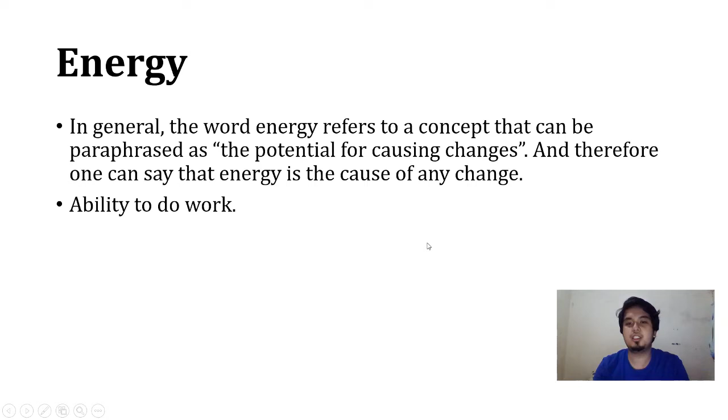So what is energy? So next is Bernoulli's energy theorem. So in my topic, I will discuss to you what is Bernoulli's theorem, derivation, and what are some of the formulas na magamit na to for determining energies like kinetic or potential. So the first is Bernoulli's energy theorem.

So the theorem states in effect that total mechanical energy of the flowing fluid, comprising the energy associated with fluid pressure, the gravitational potential energy of elevation, and kinetic energy of the fluid motion, remains constant. So in Bernoulli's theorem, there are some equations here na makakuha ka og potential energy and kinetic energy.

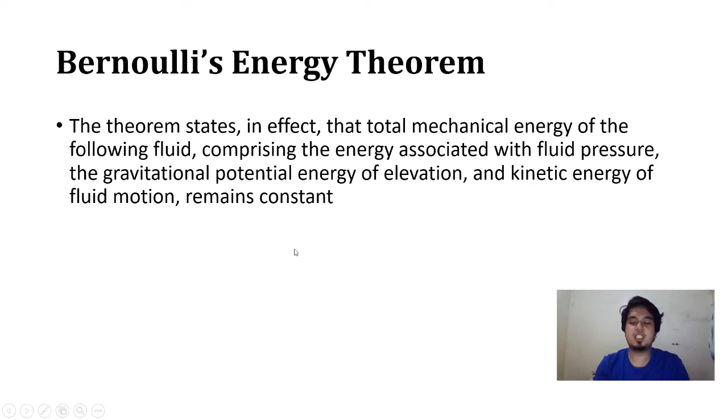So let's proceed. So first is Daniel Bernoulli. So who is Daniel Bernoulli? Swiss mathematician and physicist and was one of the many prominent mathematicians in the Bernoulli family from Basel. He is particularly remembered for his applications of mathematics to mechanics, especially fluid mechanics.

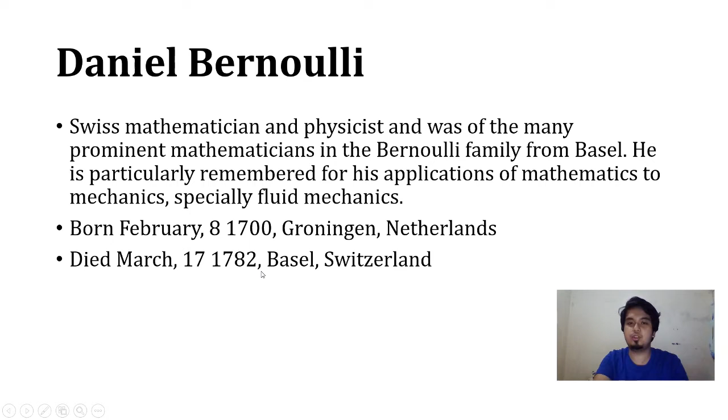Then let's proceed. So Daniel Bernoulli. So he was born on February 8, 1700 in Groningen, Netherlands. So he died March 17, 1782, Basel, Switzerland. So he was 82 years old at that time. So next is, mao ni si Daniel Bernoulli.

So next is Bernoulli's theorem derivation. So Bernoulli's theorem equation. So as you can see here sa akong illustration, at the left side, this is the pipe, and this is the pipe at the right side. So first at the left side, A1 is the cross-sectional area and X is the distance of this pipe. Then P1 is the pressure, H1 is the height, V1 is the volume,

and this one V1 is the velocity. Same as the right side, we have H2, volume 2, pressure 2, cross-sectional area 2, velocity 2, and the distance. So to come up with this formula right here, the final equation, we have some concepts. So first is dV over dt1 equals dV over dt2. So this is the time change constant equation. We can relate these concepts to come up with this final equation.

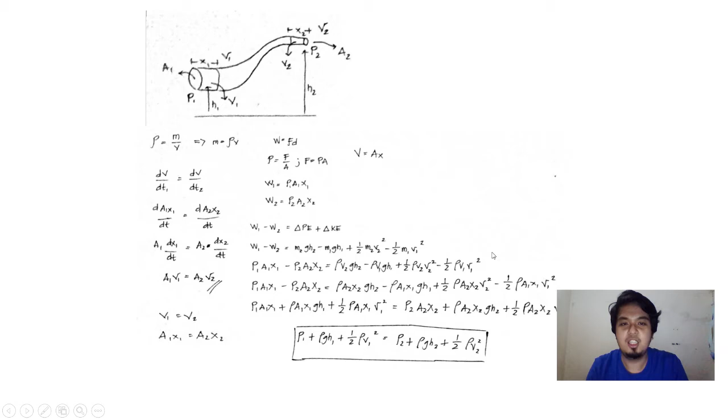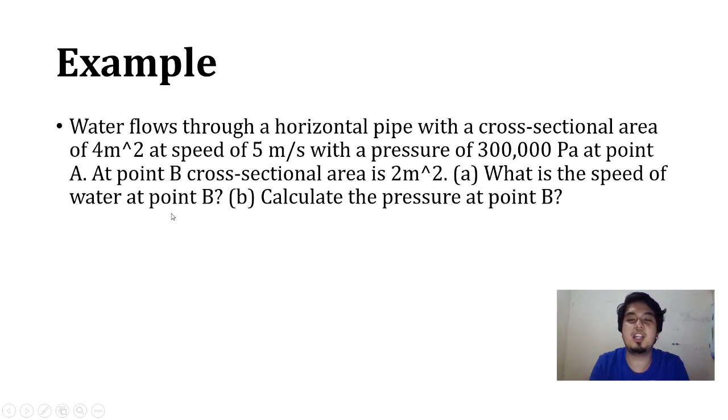So next, example. Water flows through a horizontal pipe with a cross-sectional area of 4 meters squared at a speed of 5 meters per second with a pressure of 300,000 Pa at point A. At point B, the cross-sectional area is 2 meters squared. So A, what is the speed of the water at point B? And B, calculate the pressure at point B.

So, this is my illustration, the drawing. As you can see, wala siyang height. Walay height, meaning naa siya sa surface or sa land. So, A: the velocity at A is given in the problem, 5 meters per second. And atong kuhaon ang pressure B. Area 1 is equal to 4 meters squared and area 2 is equal to 2 meters squared.

So, we can come up with this formula: Q1 equals Q2, or area 1 times V1 equals area 2 times V2. Substitute: 4 times 5 equals 2 times V2. So, the final answer is V2 is equal to 10 meters per second.

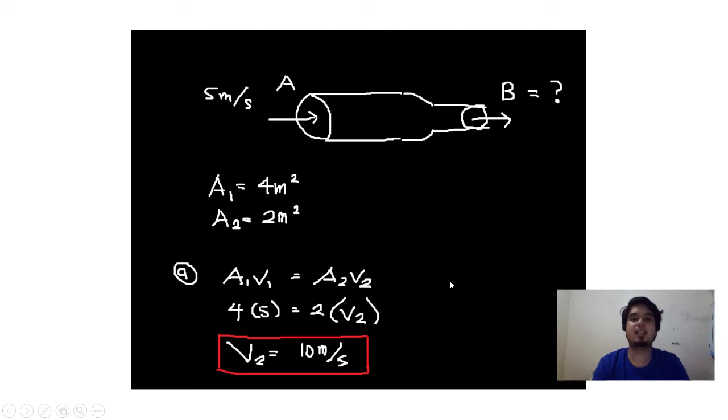Next is letter B. So, this is the Bernoulli's theorem equation. As you can see, walang height, nasa surface lang. So, P1 plus ρgh1 plus 1/2 ρV1 squared equals P2 plus ρgh2 plus 1/2 ρV2 squared. Wala siyang height, so cancel it out to come up with this final equation.

Pressure 1 plus 1/2 ρV1 squared equals pressure 2 plus 1/2 ρV2 squared. So, substitute: 300,000 plus 1/2 times 1,000 times 5 squared equals P2 plus 1/2 times 1,000 times 10 squared. So, 312,500 equals P2 plus 50,000. So we can come up with this final answer, P2 equals 262,500 pascals.

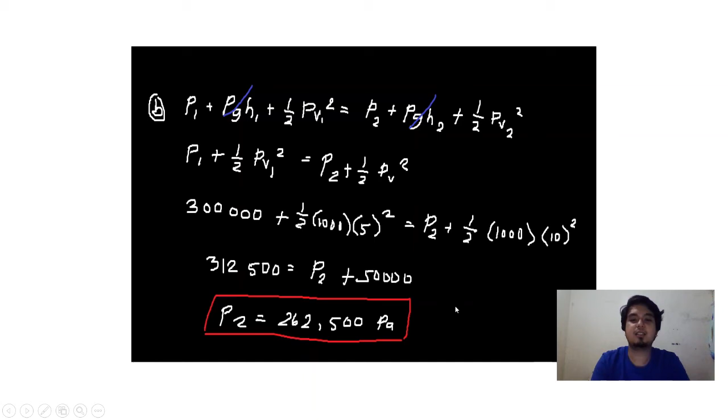So next is the head loss in pipes. It refers to the measurement of energy dissipated in a system due to friction. It accounts for the total energy losses due to the length of a pipe and those due to the functioning of fittings, valves, and other system structures. So head loss sa pipe. If naa siya height, head loss, so tan-awon nato kung unsa ang difference sa iyang height.

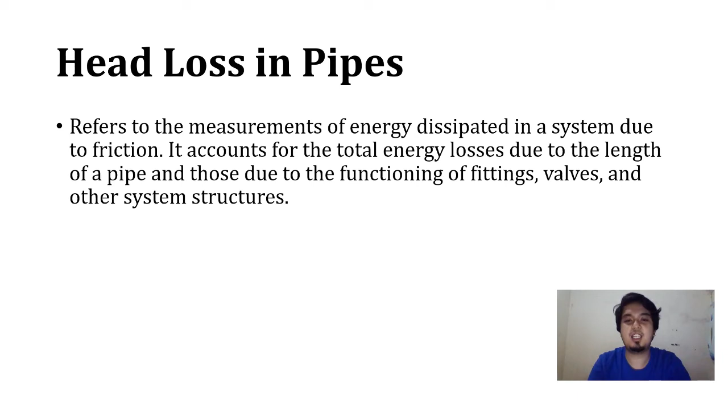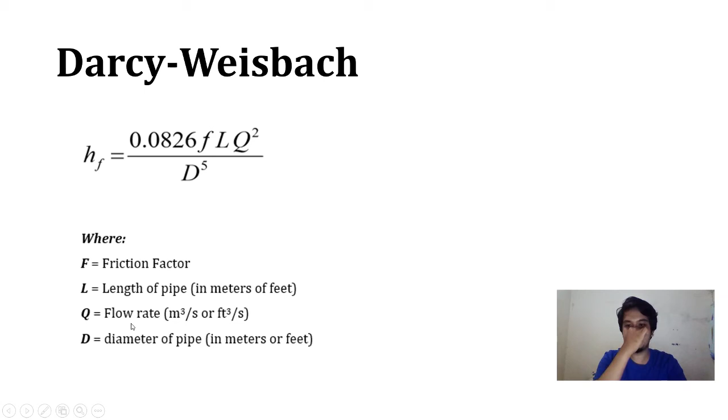So next, there are three methods in determining head loss in pipes. First is the Darcy-Weisbach, next is the Manning's formula, and the last one is the Hazen-Williams formula. First is the Darcy-Weisbach. The formula is hf equals 0.0826 f L Q squared over D raised to 5. Ang kaning mga formula, naa ni sa hydraulics. Where f is the friction factor, L is the length of pipe, Q is the flow rate, and D is the diameter of pipe.

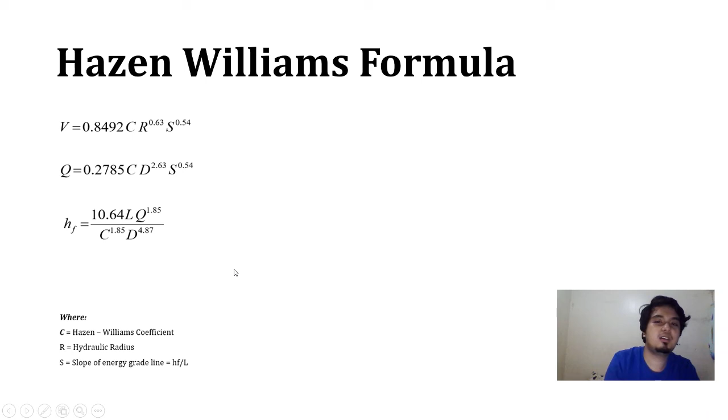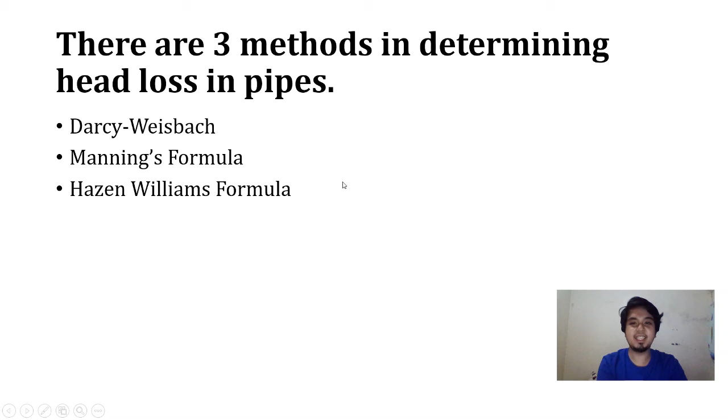So these are the three methods of determining the head loss in pipes. Magamit mo ni siya depende sa mga given, kanang mga given data sa mga problems. So my example is this: Hazen-Williams and Manning.

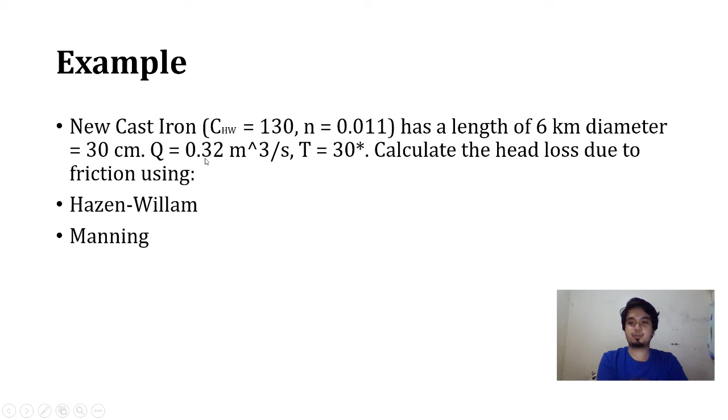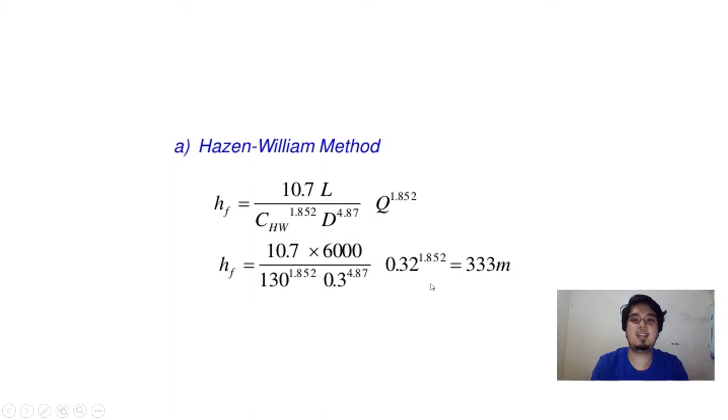So the formula is hf equals 10.7 times L over C_HW raised to 1.852 times D raised to 4.87 times Q raised to 1.852. Direct substitution: hf equals 10.7 times 6,000 over 130 raised to 1.852 times 0.3 raised to 4.87, times 0.32 raised to 1.852. The final answer is 333 meters. So that's the Hazen-Williams method.

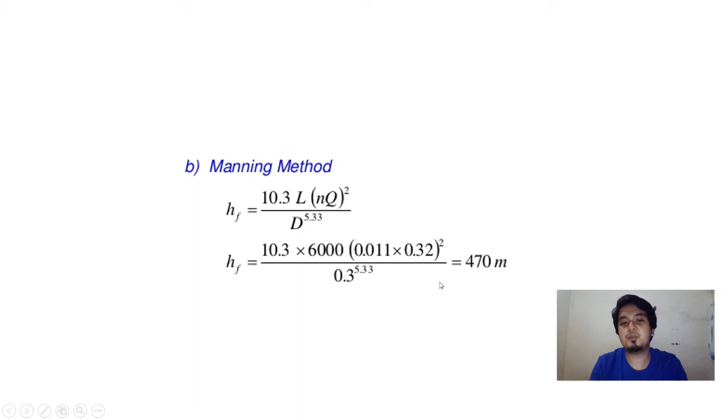Next is the Manning method. hf is equal to 10.3 L n squared Q squared over D raised to 5.33. Direct substitution: hf equals 10.3 times 6,000 times 0.011 squared times 0.32 squared over 0.3 raised to 5.33. And the final answer is 470 meters.